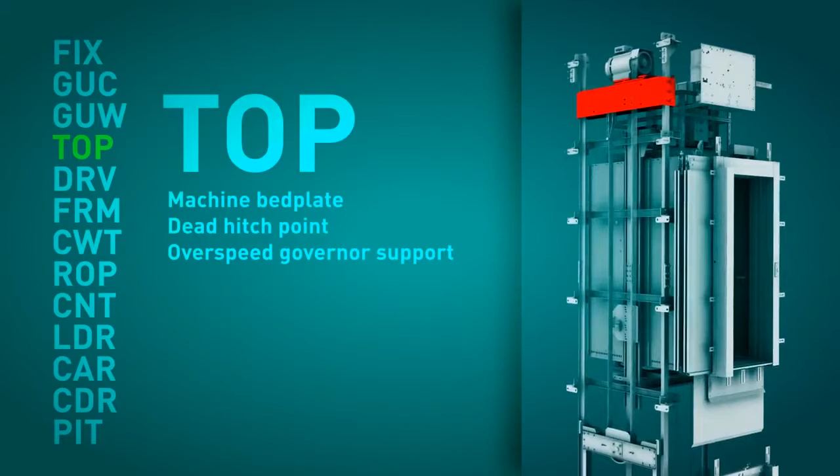Each module can be made up of one or more packages. These packages are identified with a description of the module and its position within the assembly sequence. The supply of the elevator has been designed to fit what we consider to be the logical assembly sequence of a machine roomless elevator.

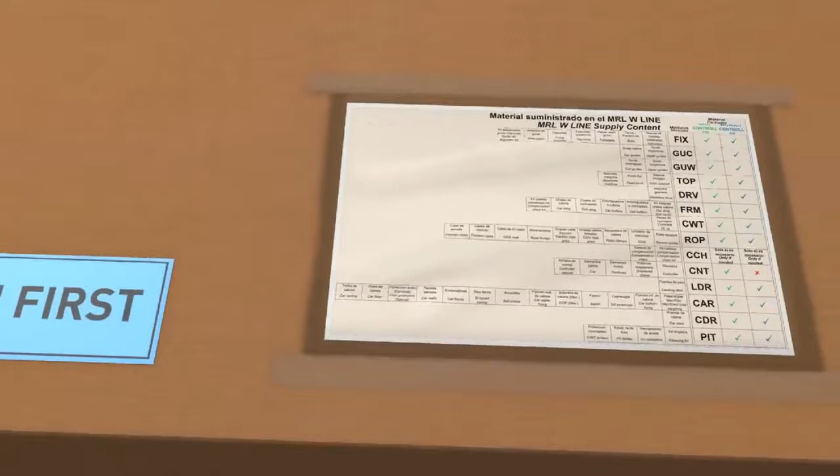The package that we have to open first is labeled and easily identifiable. Attached to this package, in a protective plastic cover, is the packing list and a document which details and lists the material supplied in each of the various modules.

In this first package, we can find the assembly manual of the elevator and all the assembly handbooks of the individual components. Before starting the assembly process, we strongly recommend the assembly technicians read all the manuals in detail.

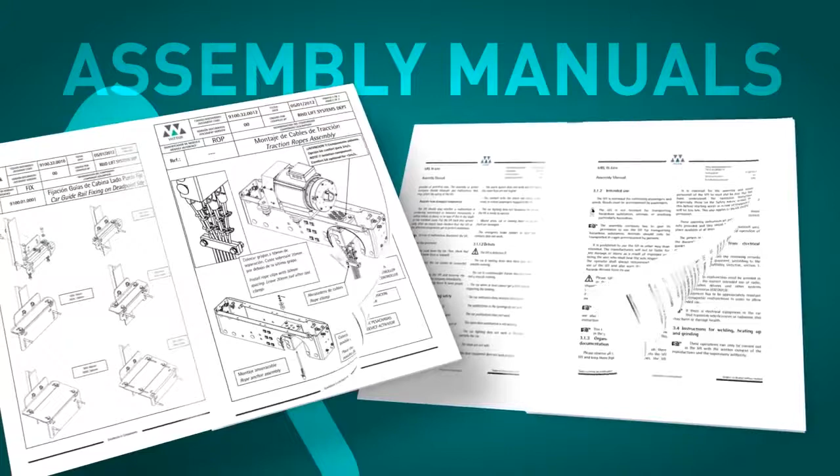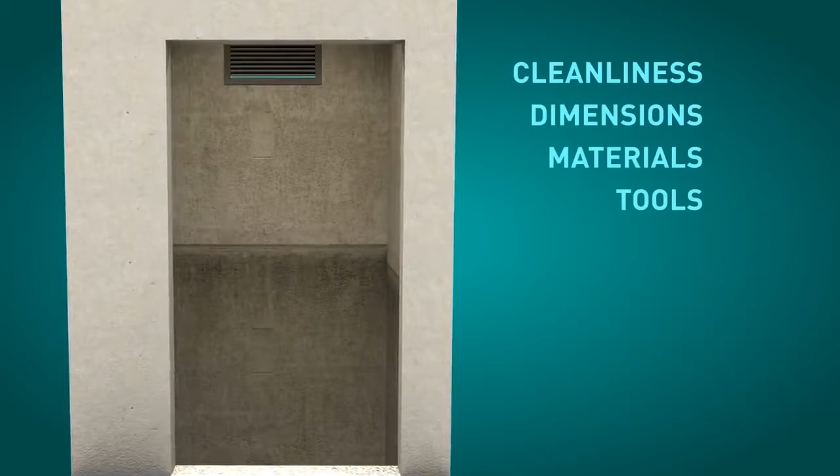The assembly of the MRLW line starts by checking that the conditions of the shaft, dimensions, cleanliness are satisfactory and that all the necessary material and auxiliary tools are available on site. The guide rail sole plate must be correctly positioned and levelled according to the assembly manual.

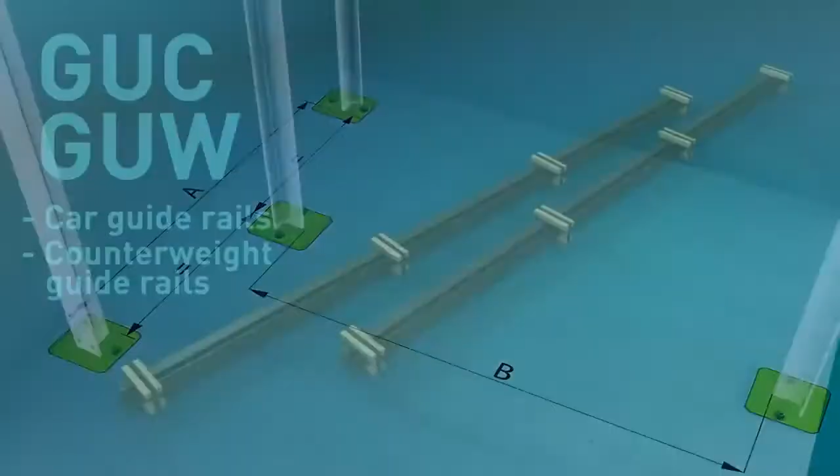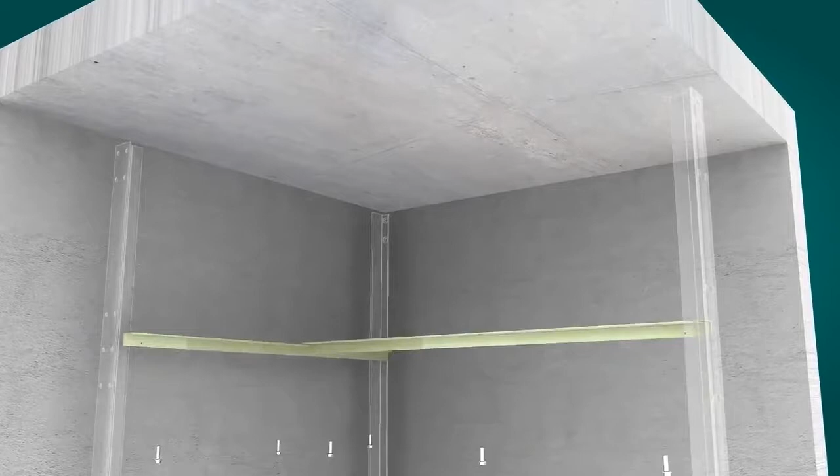The bottom portions of the car and counterweight guide rails are cut and assembled according to the installation drawings. Should there be a difference between the pit depth given in the installation drawings and the as-built depth, the bottom guide rail can be adjusted and cut to the right length.

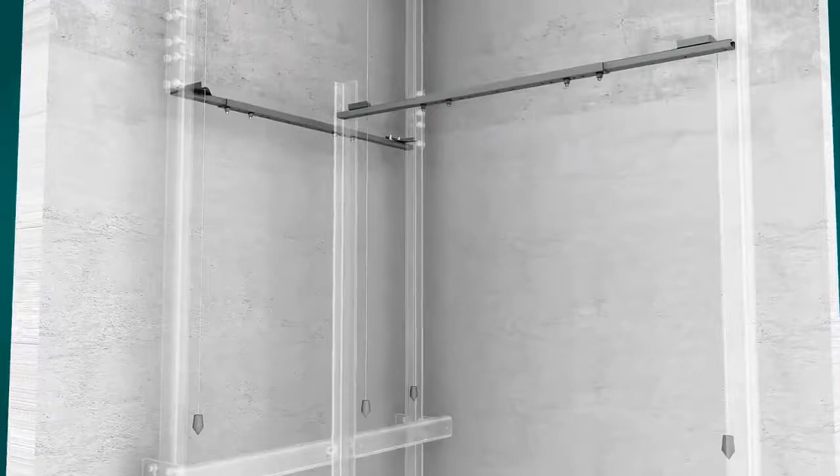A tool to help align the guide rails is recommended in order to guarantee a correct assembly. Vita can supply a guide rail alignment kit upon request. The first row of guide rail supports is assembled. Their position is detailed in the installation manual.

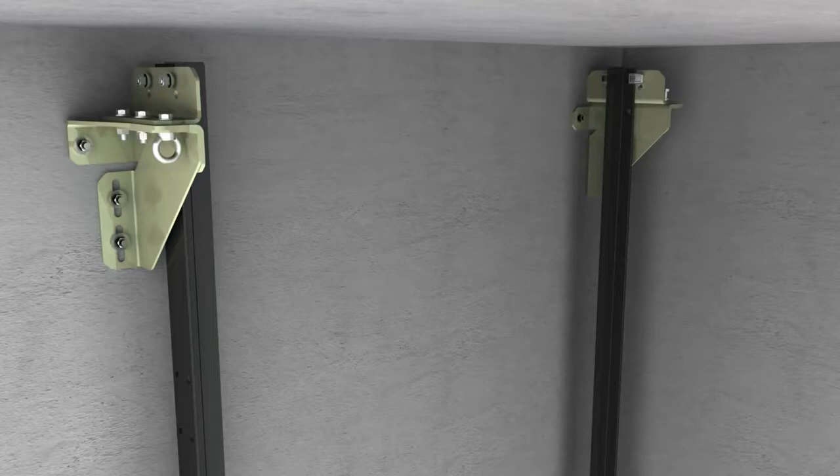With the help of some scaffold platforms, the successive guide rail portions, 2.5 meters or 5 meters, are assembled with their corresponding support brackets. Once the last section of the counterweight guide rail has been assembled, the topmost bracket can be fixed into place. The last portion of the car guide rail fixed to the bed plate is assembled once the machine support has been installed.

Alternatively, the process of assembling the guide rails can be carried out from a temporary platform which is fixed to the guide rails that have already been mounted and lifted up through the shaft by means of a block and tackle.

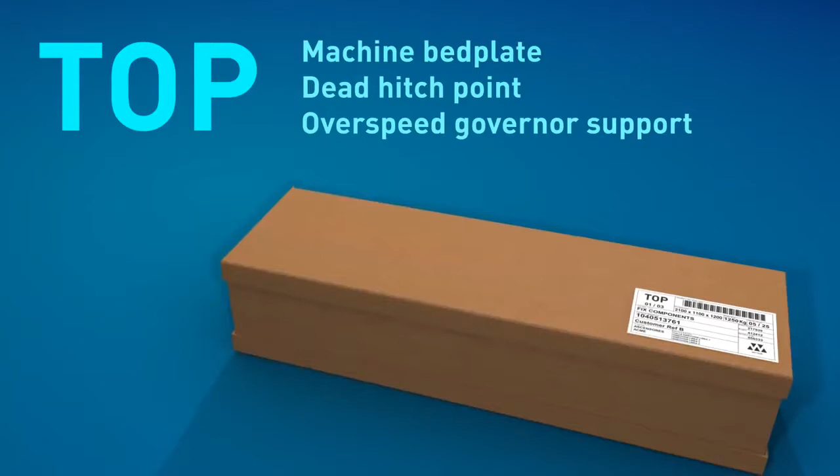The machine bed plate is assembled next. A comfort kit is standard supply for 1.6 meters per second, but optional, though highly recommended, for 1 meter per second. These low-frequency metallic cushions absorb any vibrations that the system may produce.

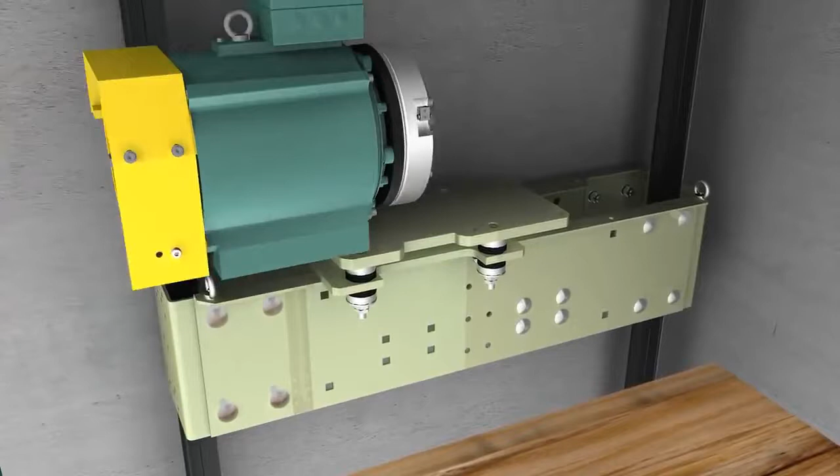The machine is fixed to its support and is lifted and guided into position with the help of a block and tackle. It is fixed to the sheave side with the fixings provided, and once the machine is level, these fixings and the clamp can be tightened. Once the machine is in place, the penultimate guide rail support and the last section of car guide rail fixed to the bed plate can be assembled.

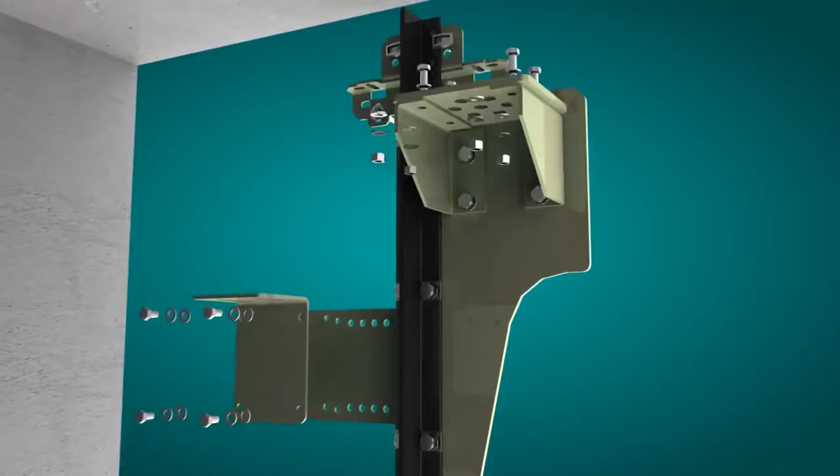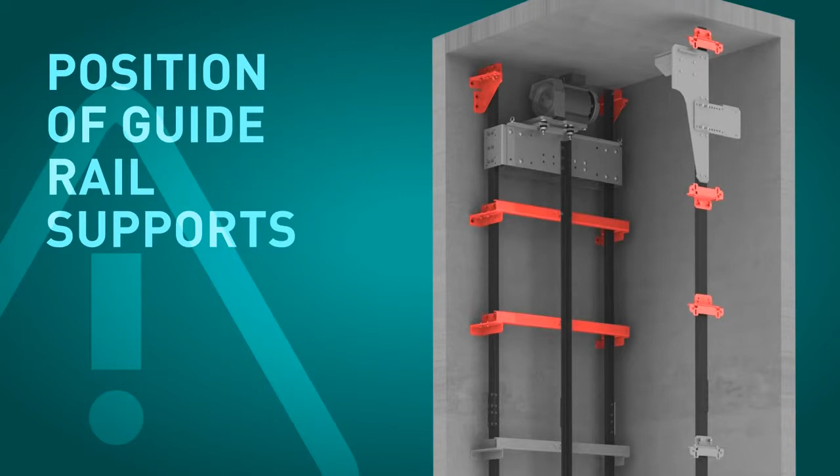The dead hitch point can now be assembled, followed by the overspeed governor and the slack cable control device, should it be applicable. At this point, all the mechanical elements of the elevator are assembled in the headroom. All the guide rail supports must be placed in the positions detailed in the installation drawings. The position of the top and bottom brackets is of special importance. Any scaffolding and platforms should be removed at this point.

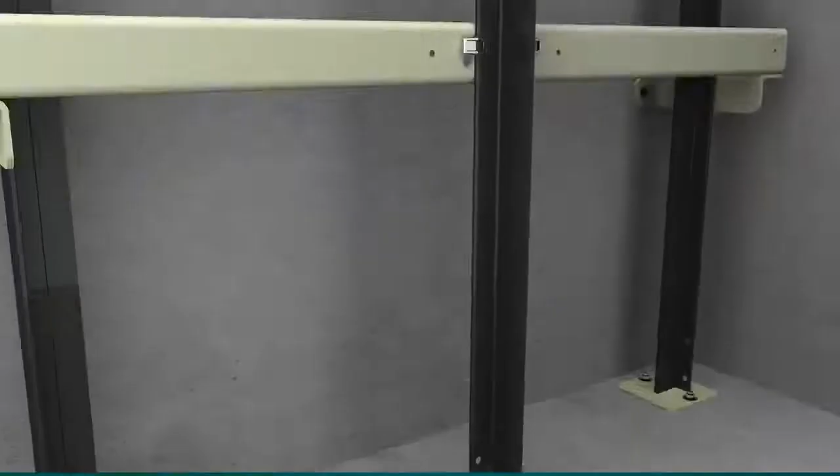It is now time to go into the pit. In the module FRM, we will find all the components relating to the car and counterweight frames and the buffers. The counterweight buffers should be assembled first of all in the position detailed in the installation drawings. Resting on its buffers, the counterweight frame is then assembled.

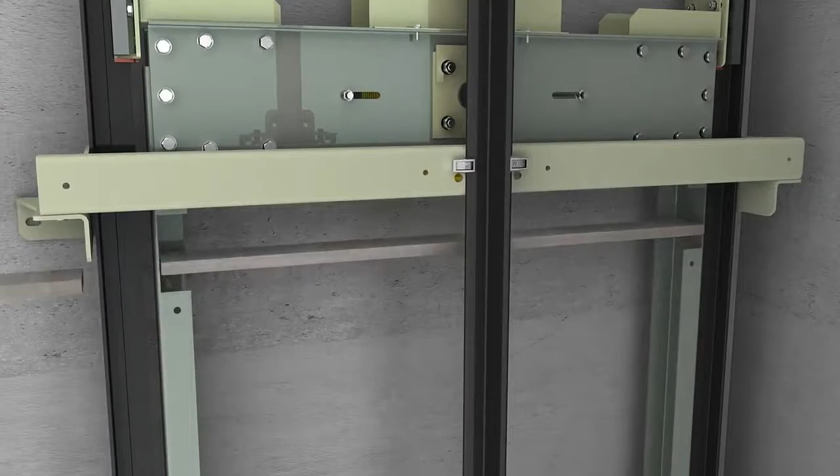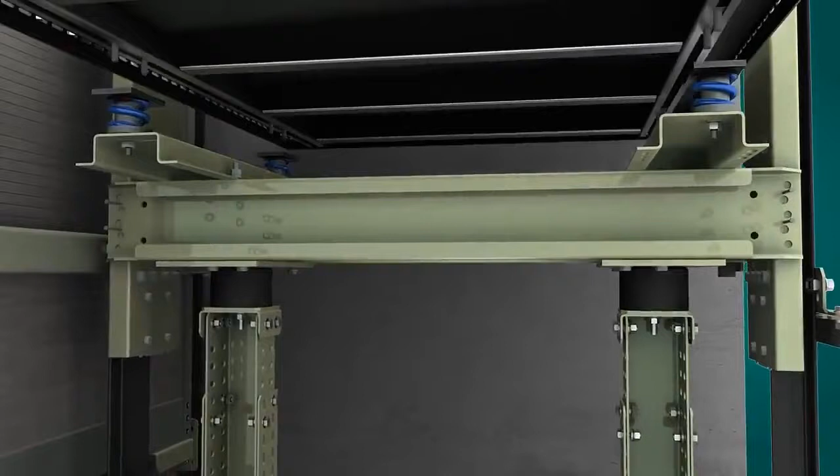A partial loading of the counterweight should then be carried out, according to the individual assembly requirements of each elevator. The car buffers are assembled next, in the position detailed in the installation drawings. Resting on its buffers, and on the car floor, the car frame is assembled. As an optional accessory, Vita offers a temporary protection to protect the car floor whilst the assembly process is taking

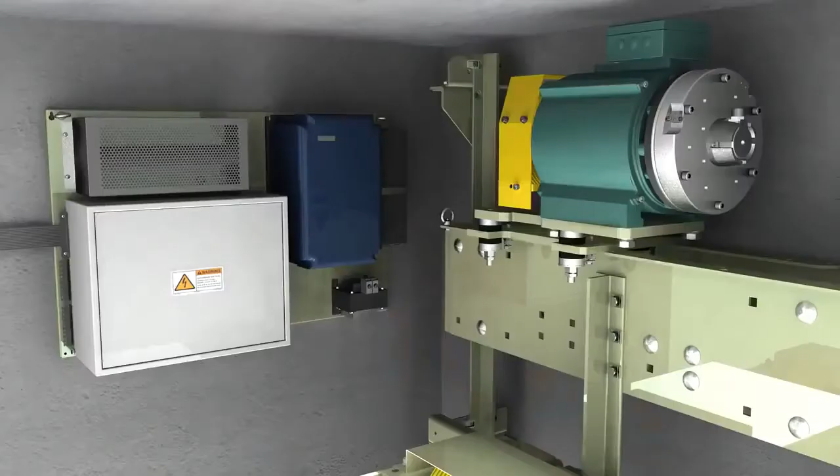place. The slings are now correctly assembled and positioned within the shaft and between the guide rails, and it is time to suspend the car slings in order to assemble the traction ropes. All the necessary material is supplied in the module ROP. The machine should previously have been connected to the power with the encoder cable.

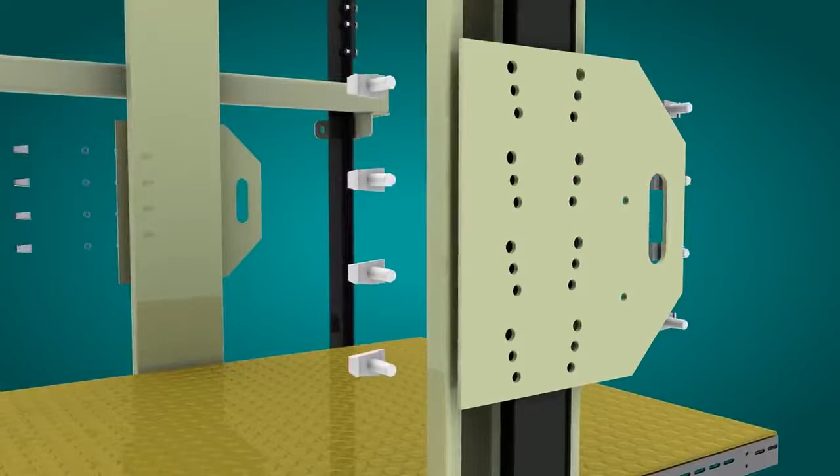The car sling is then lifted with a block and tackle to the highest floor that allows the floor of the car to lie flush with the landing FFL. Its position is maintained by means of the car frame locking kit. This element has not been designed to specifically suspend the car, but to fulfill the function indicated in clause 6.4.3.1 of the standard EN 81-1 A3.

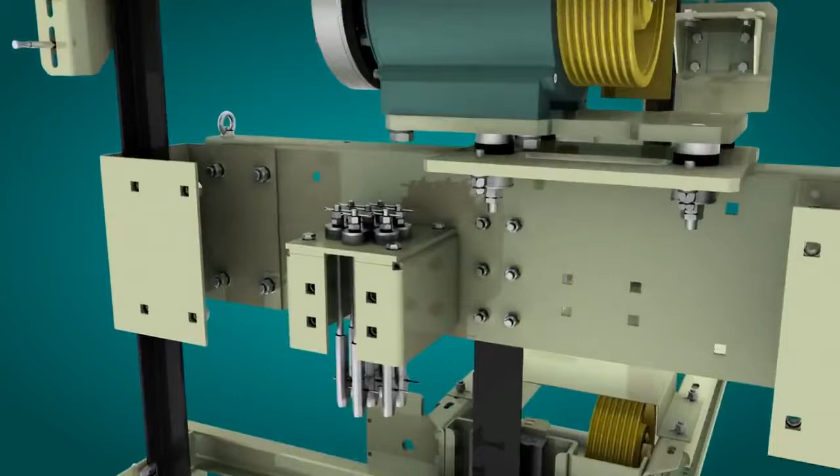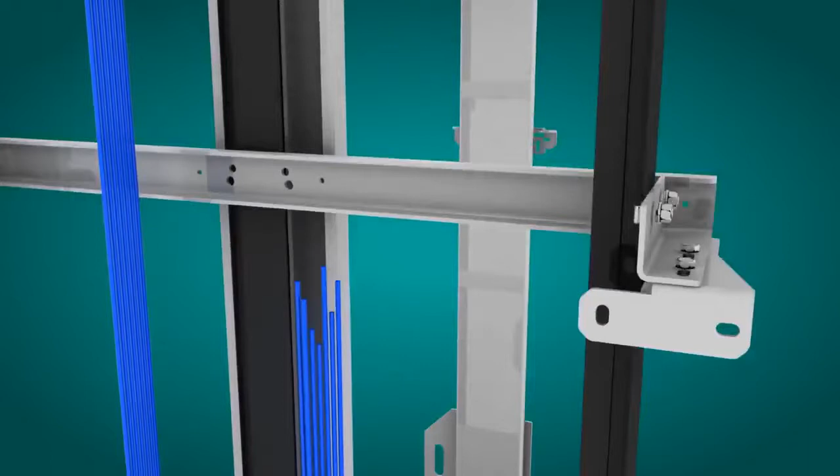For the assembling of the traction ropes, please follow the instructions detailed in the elevator's installation manual. Repeat the process as many times as needed. A rope clasp guarantees the correct alignment of the ropes as they are fed into the grooves of the sheave.

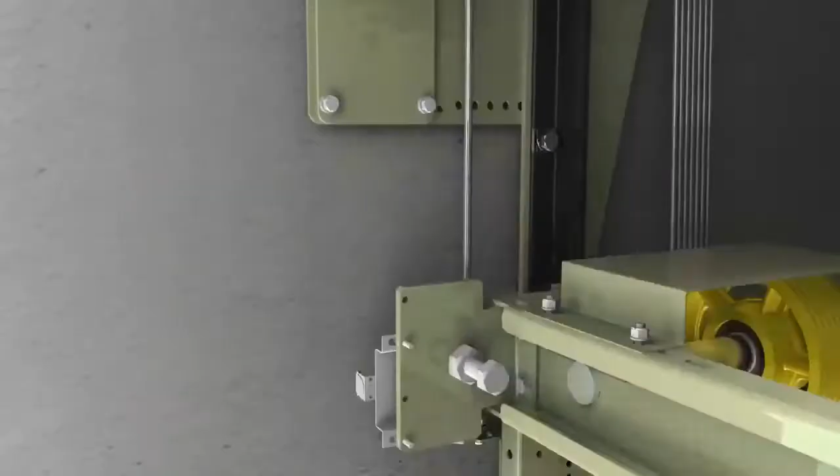The next step is the assembly of the overspeed governor, its tension weight and the cable that joins them. The fixing of the overspeed governor cable to the frame is the last stage of this subassembly. At this stage, the elevator can be used as an elevating platform with the use of an assembly operating panel. The elevator must be handled with great care during these journeys.

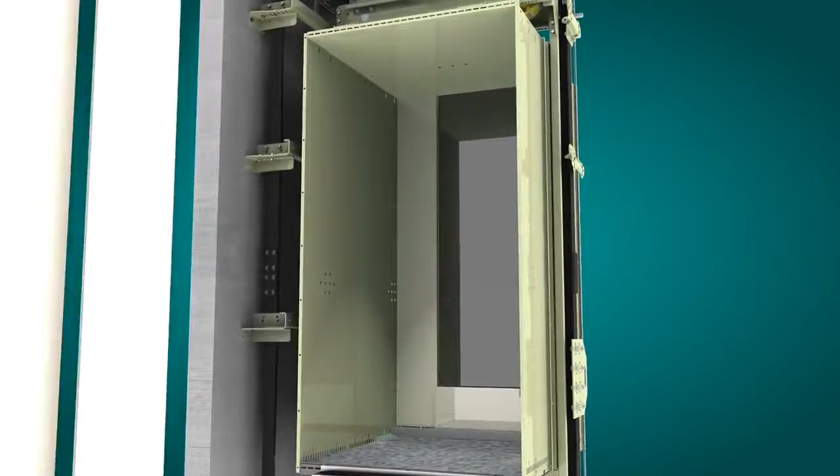With the help of the elevating platform, the landing doors are assembled. Before starting the assembly of the car, it is essential to mechanically block the car frame and to remove the floor protection should it have been used. It is now time to assemble the car door.

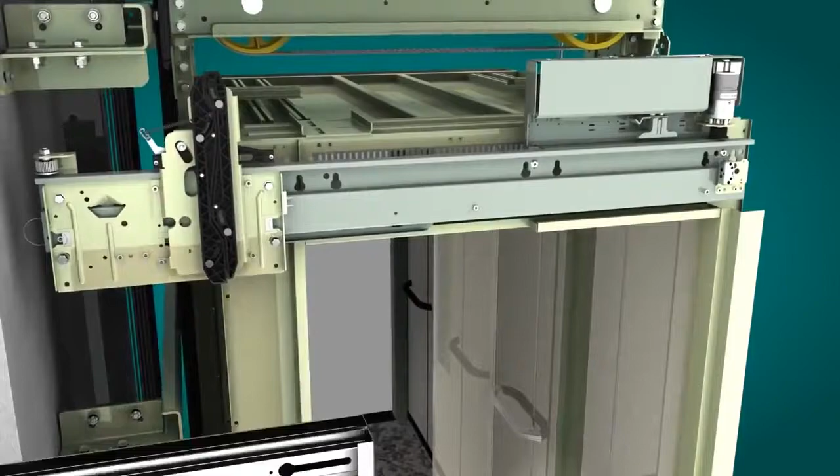The pit components can now be put into place. The counterweight screen is fixed to the guide rails, and should it be applicable, the pit ladder is fixed inside the pit. From this point onwards, the electrical elements can be assembled.

The MRLW line controller, with its plug-and-play concept, is probably one of the market's most easy and intuitive controllers to install. It is delivered perfectly packed and identified in 4 packages: power and control, pre-assembled electrical installation of the shaft, electrical elements of the car, and the controller cabinet.

In each of these packages there are various assembly kits, each one accompanied by a description of its contents and an assembly manual, numbered according to the assembly sequence. The controller cabinet, with its reduced dimensions, is placed neatly in front of the frame of the landing door located on the last floor. The simplicity of the controller does not reflect its features.

The MRLW line controller can be supplied also according to other standards, such as EN 81-70 and EN 81-73. Upon request, it can also be adapted to the EN 81-71 and EN 81-72.

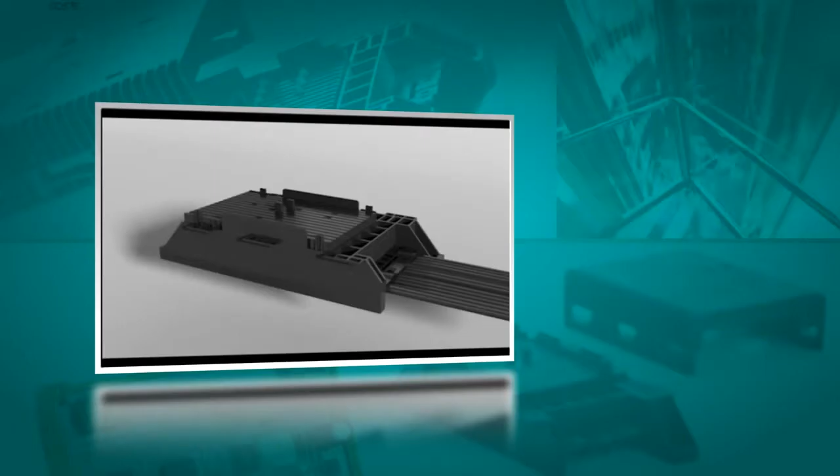Our pre-assembled electrical installation uses the CON-box system, which greatly reduces the assembly time, guarantees the quality of the CAN bus signals, and sets us apart from our competitors.

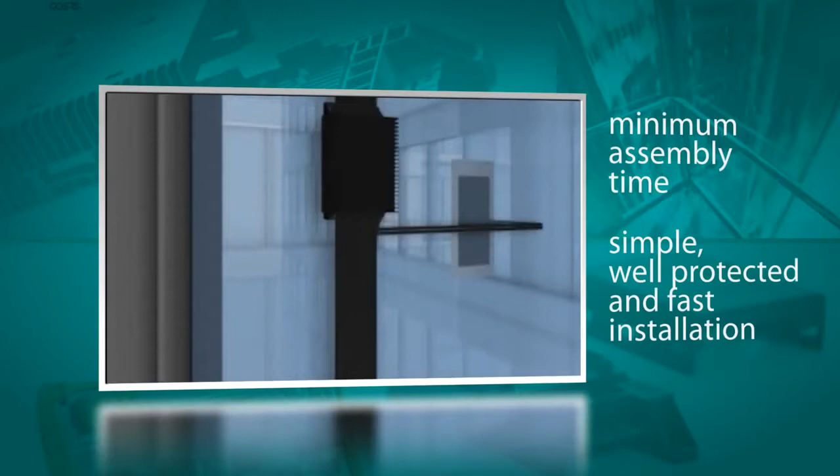The flat cable is manufactured with highly resistant and durable materials, which guarantee an optimal protection of the low-frequency CAN bus signals. An absolute positioning system of the car by means of a 4096 pulse encoder is optional. This makes assembly easier and guarantees millimetric precision of each stop.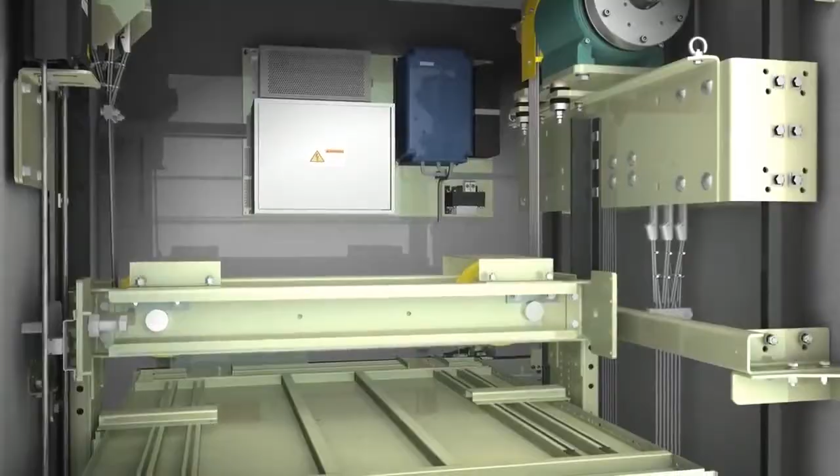The penultimate task is the important one of cleaning the shaft and the pit, and of oiling the guide rails. Finally, before the lift can be put into service, the MRLW line must be submitted to a series of tests, according to Annex D of the EN 81-1 A3, in order to ensure the perfect functionality and safety of the lift. VITA supplies a specific document which guides the assembly technician through all the steps that must be carried out.

VITA has been issued by IONOR a conformity certificate, confirming the implementation and maintenance of a quality assurance system for the design, manufacturing, and final testing of elevators, and certifying that it complies with the requirements of Annex 1 of the Lift Directive

95/16/EC. This means that any assembly company with a quality assurance system compliant with the Annexes 12 Module E or 14 Module D of the Lift Directive 95/16/EC can put the lift into service and certify it accordingly. VITA can also supply the necessary documentation allowing any assembly company without a quality assurance certificate the possibility of certifying the elevator through an external notified body according to Annex 6